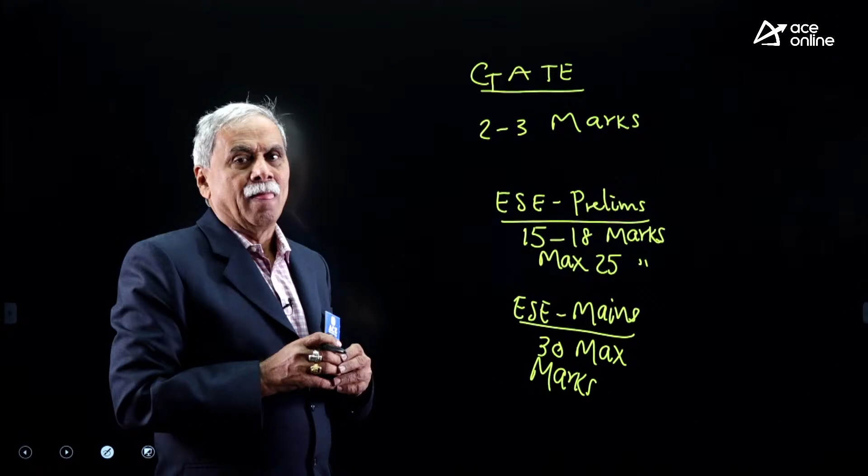If you take ESE prelims, 15 to 18 marks, sometimes maximum of 25 marks. If you take ESE mains, maximum 30 marks. You can understand, for GATE, irrigation engineering is not a scoring subject. For ESE prelims and ESE mains, it is one of the most prominent, as much important as fluid mechanics, as much important as geotechnical and environmental engineering subjects.

Approximately I have given. Slight variation may be there in the actual paper. It all depends on the year-wise team of the paper setters. This is mainly intended for GATE paper. Let us see. If you refer to the GATE examination: basics of water resources engineering, soil, water and plant, water requirement of crops, quality of irrigation water,

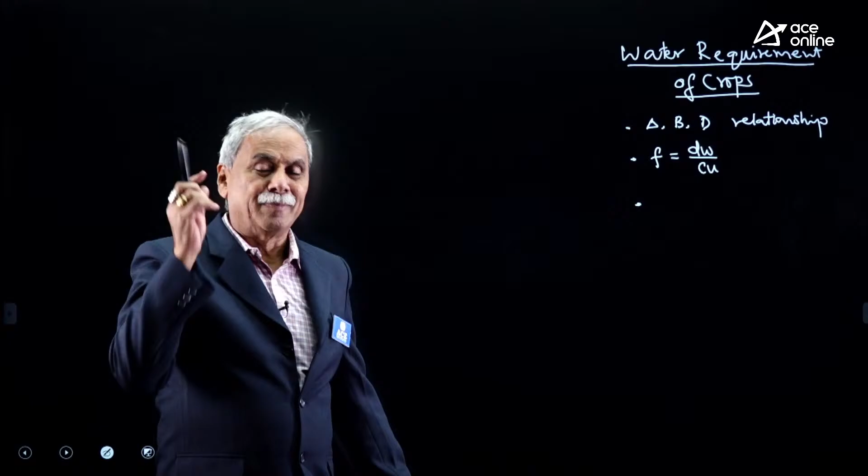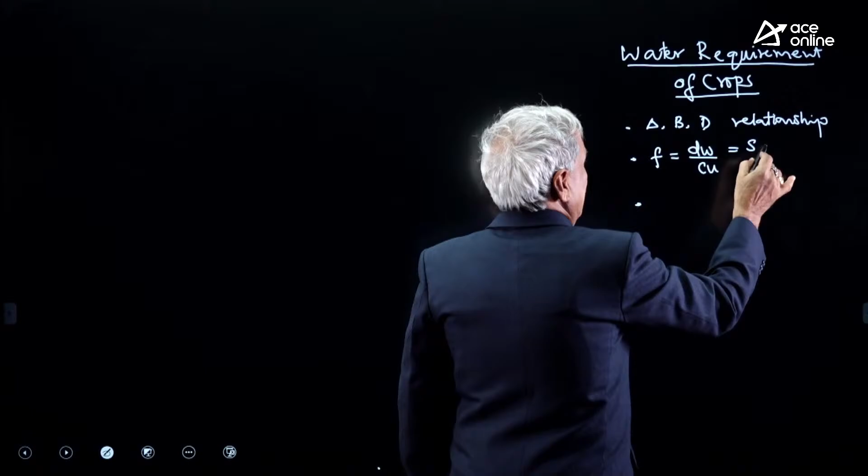Delta is equal to 8.64 B by D, 864 B by D, 1.98 B by D. Frequency of irrigation is equal to dW by Cu. What is the time interval between one watering and the next watering? Time gap between 2 consecutive waterings is called frequency of irrigation. It depends on specific gravity of the soil, root zone depth, field capacity and optimum moisture content divided by consumptive use.

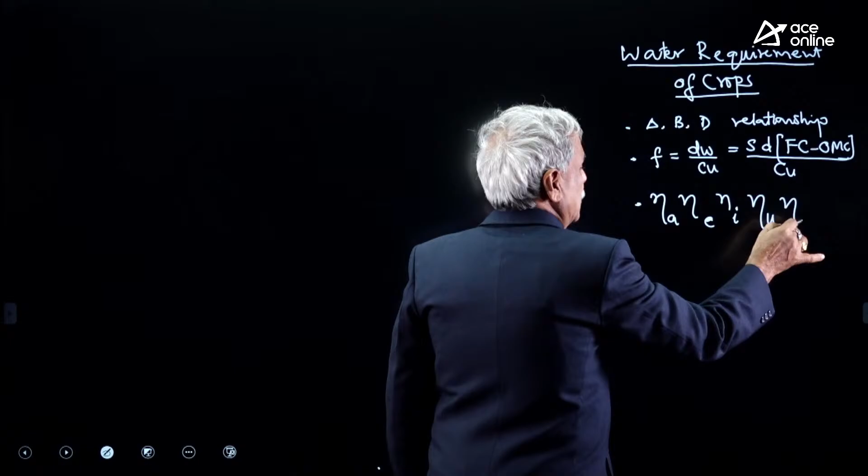The 5 types of efficiencies are very important. Water application efficiency, water conveyance efficiency, water irrigation efficiency, water use efficiency, water distribution efficiency. Water consumptive use efficiency, like that, they are not that much important. Please practice these 5 formulas regarding water efficiency.

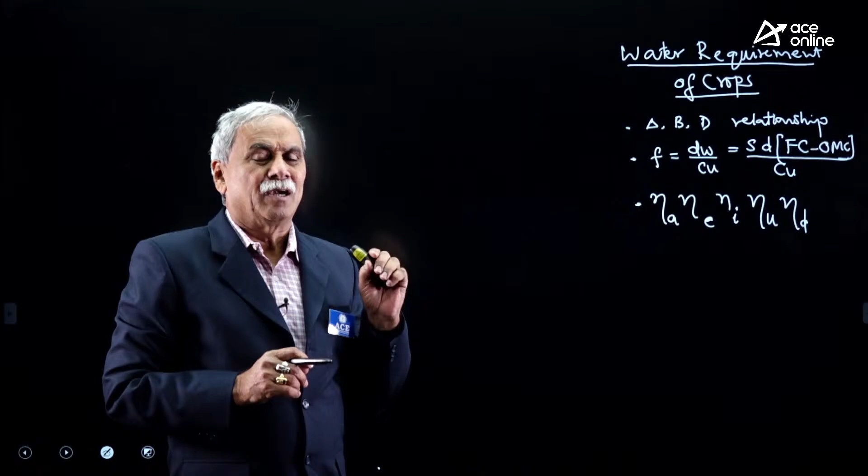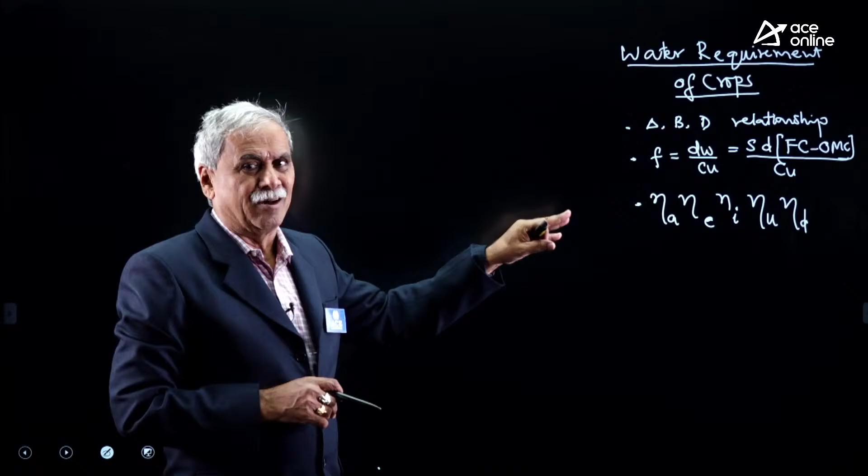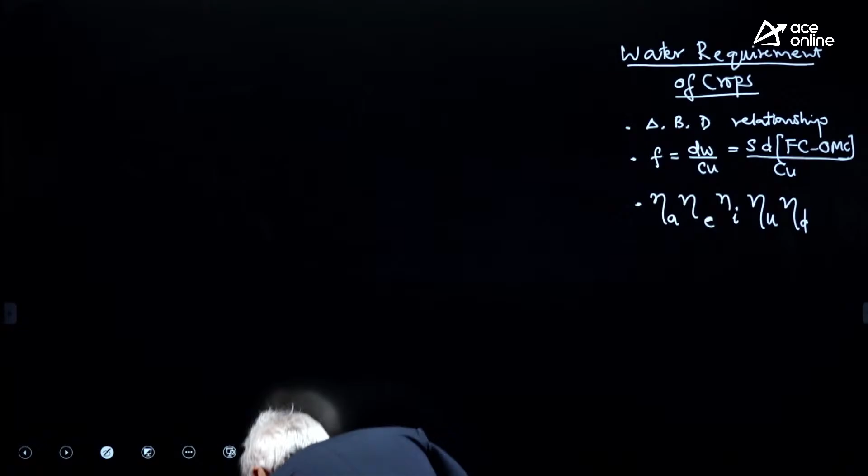Water application efficiency, that is in the field. Water conveyance efficiency in the canal. Water irrigation efficiency overall. Water use efficiency in the field including leaching. Water distribution efficiency, that is statistical efficiency. Then we should know FIR, what is consumptive irrigation requirement, net irrigation requirement, field irrigation requirement, gross irrigation requirement.

Then you must know what is intensity of irrigation. Then you should know fixation of line discharge of the canal. Fixation of reservoir capacity. These are the subtopics you have to concentrate on while you are preparing for GATE from the chapter of water requirement of crops.

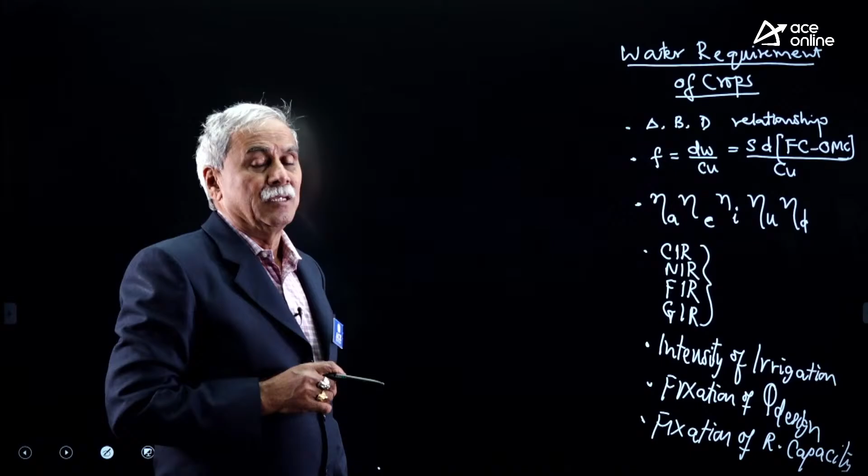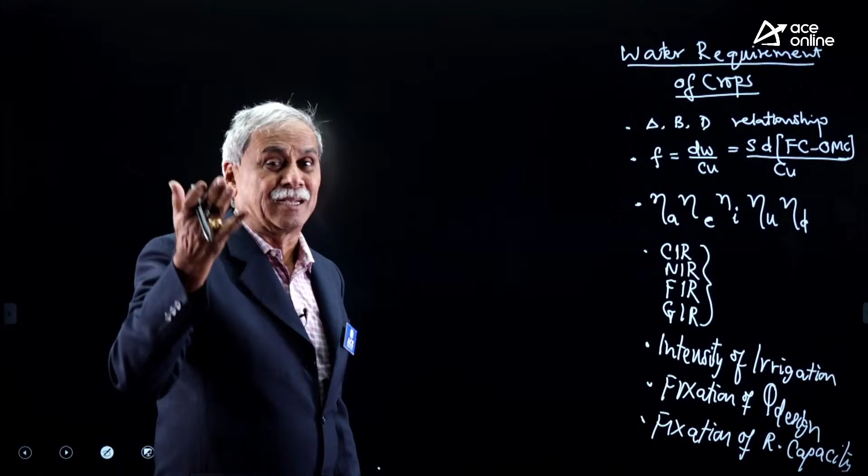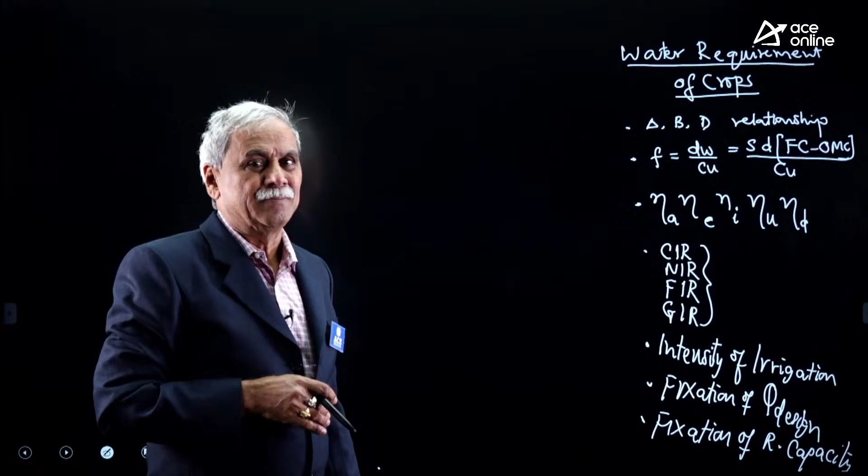Relation between the 3 water requirements, duty, delta and base period, their definitions, relation like dW by F is equal Cu by 1 is equal delta by B, such strategic formulas, very, very important. What are the factors affecting duty? At what points with what name is duty being called? How do you improve the duty? By crop rotation, etc. These are the water requirement of crops, most important ones.

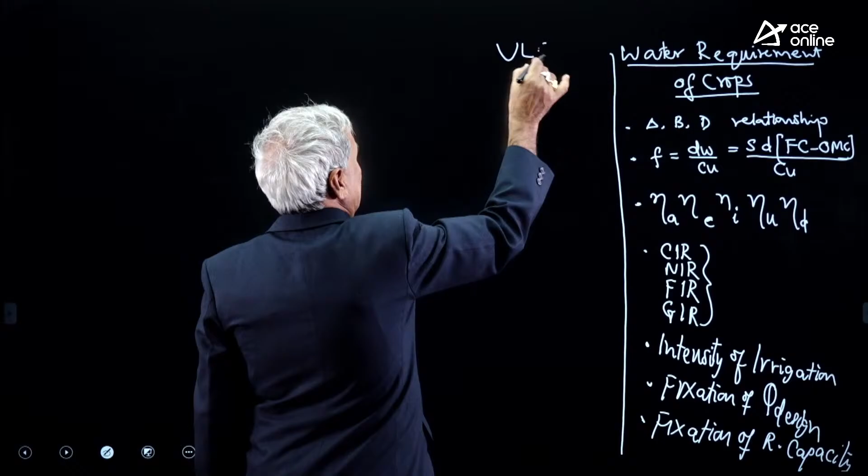In the design of unlined canals, what are the causes of silting and scouring? Kennedy's theory. Its drawbacks. Lacey's theory. Its advantages and drawbacks.

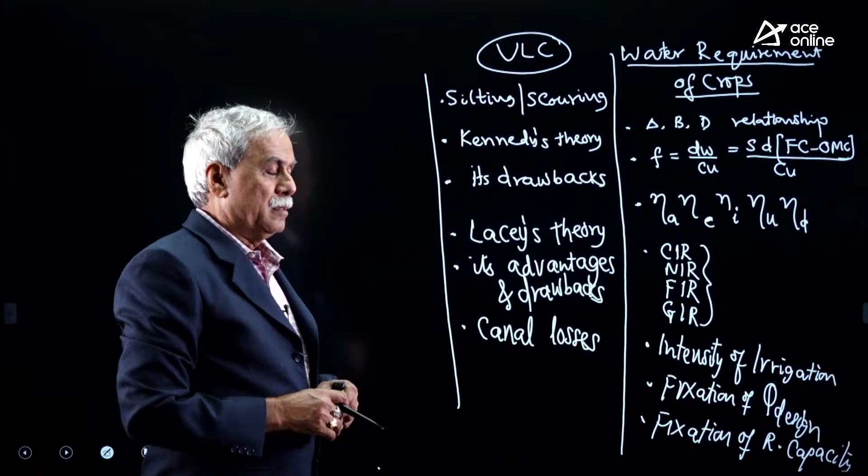Canal losses. We know evaporation losses are minor losses. Seepage losses and percolation losses are major losses. Around 2 to 3% is evaporation loss. Around 20 to 30% will be seepage and percolation losses. Something about the losses also must be known. Speciality of Lacey's theory. Importance of Kennedy's theory. What are the critical differences between Kennedy's theory and Lacey's theory? Generally, they will ask you.

Non-silting, non-scouring velocity is a function of what parameter in Kennedy's, what parameter in Lacey's. In Kennedy's, it is the depth of the flow. In Lacey, it is the hydraulic mean depth. In Kennedy, V0 is equal 0.55 m D power 0.64. So, critical velocity is a function of depth of the flow only. Whereas in the case of Lacey's theory, critical velocity is given by V is equal to root of 2 by 5 f R. So mean velocity or critical velocity is a function of hydraulic mean depth in the case of Lacey's theory.

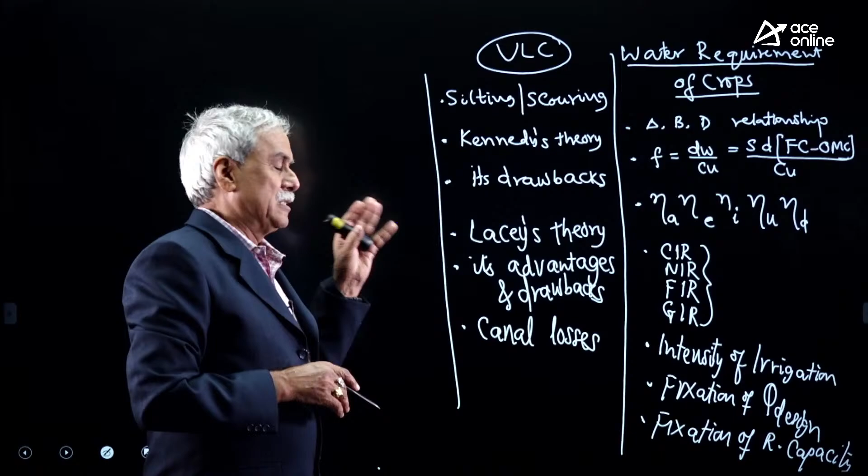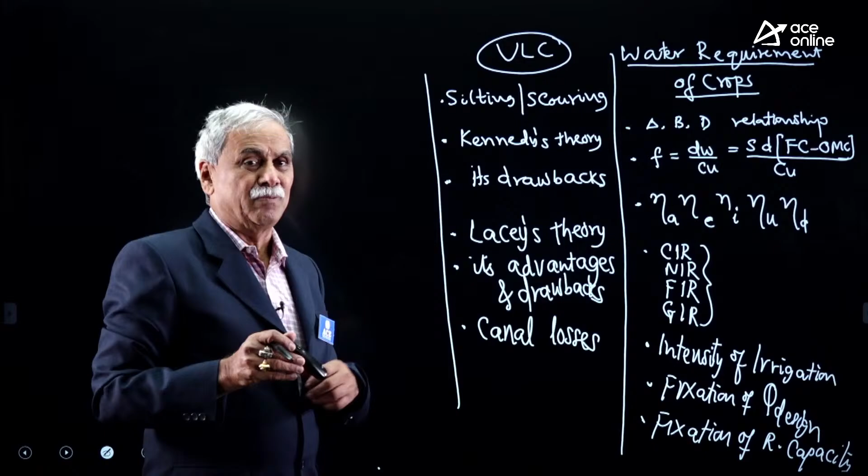What are the advantages, what are the drawbacks of Lacey's theory also you must understand. Their mathematical formulas. In Lacey's theory, how many are fundamental equations? How many are derived equations? What are the graphs drawn between various parameters? Basics of mathematics in solving the questions also important.

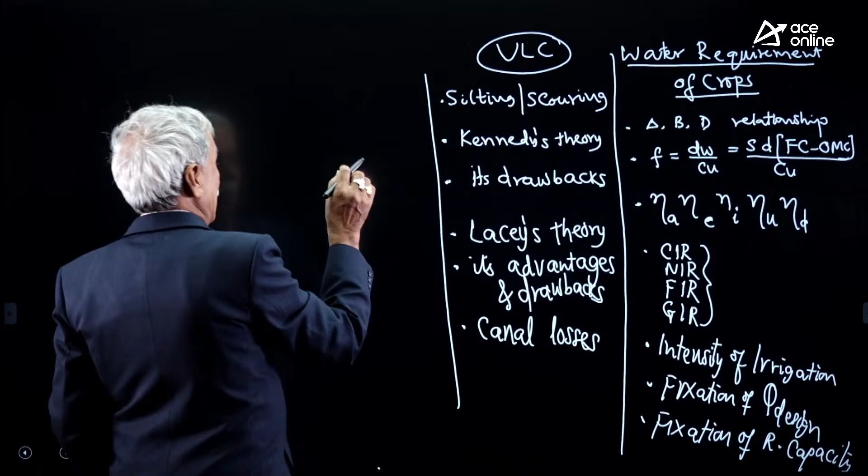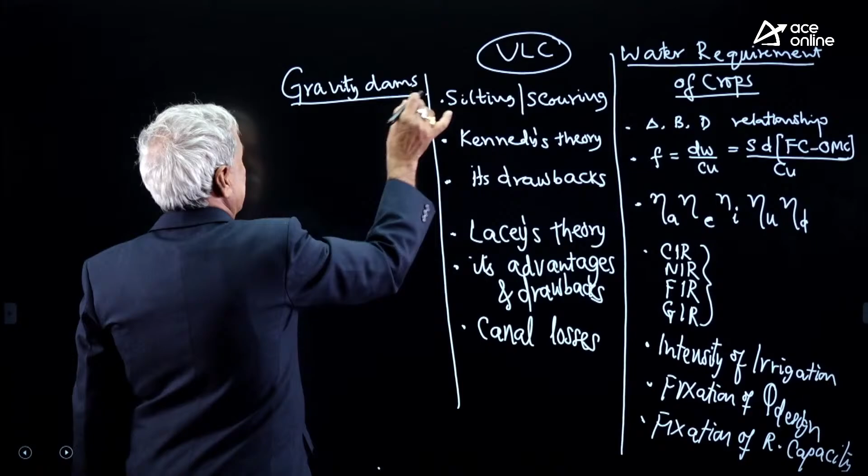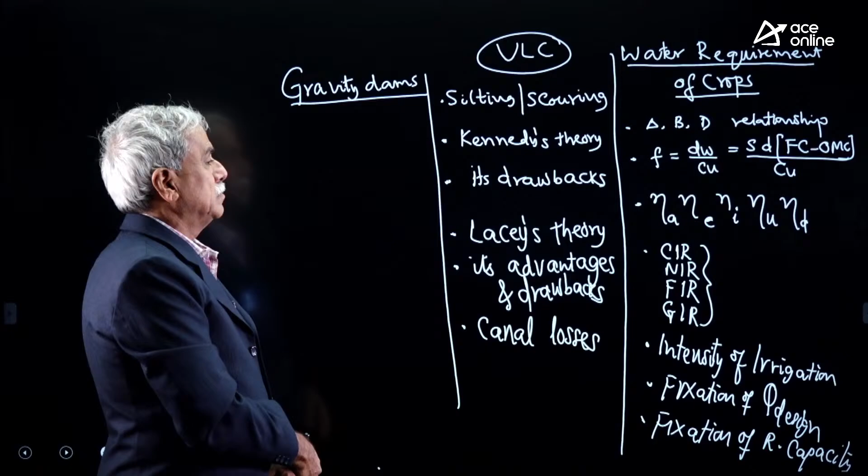Then in the third chapter, in gravity dams, what are the most important subtopics? Water levels in the reservoir, water storages. What do you mean by limiting height? Fixation of a freeboard. What is the use of the limiting height to decide whether the dam is a high dam or low dam?

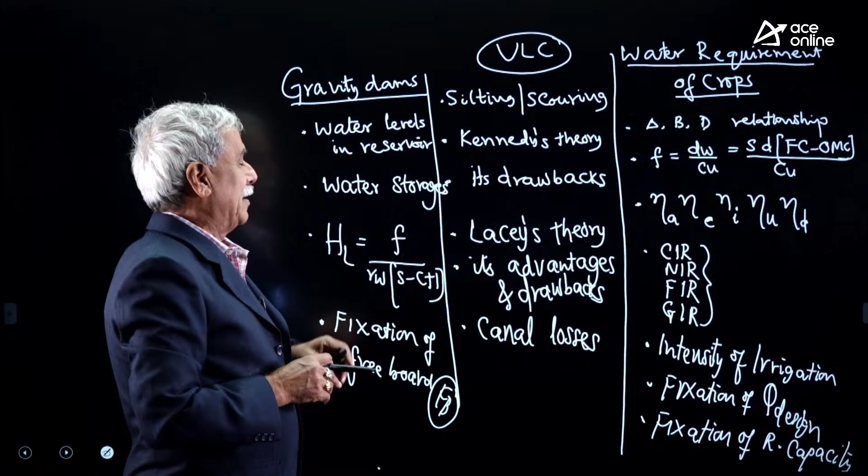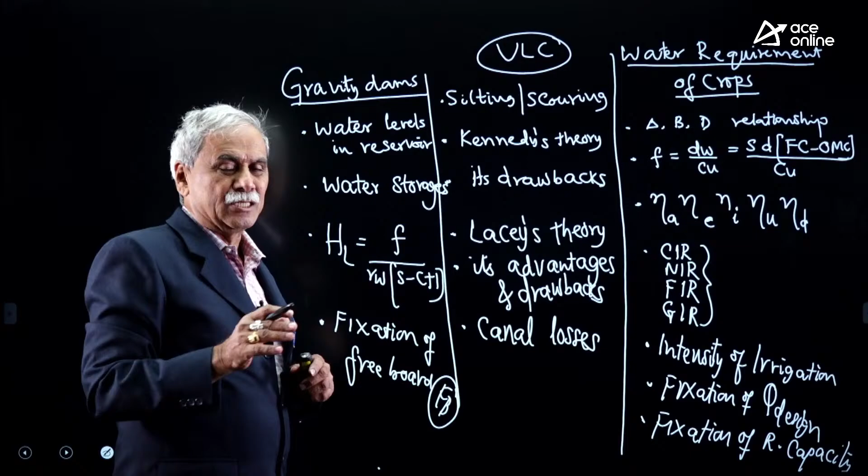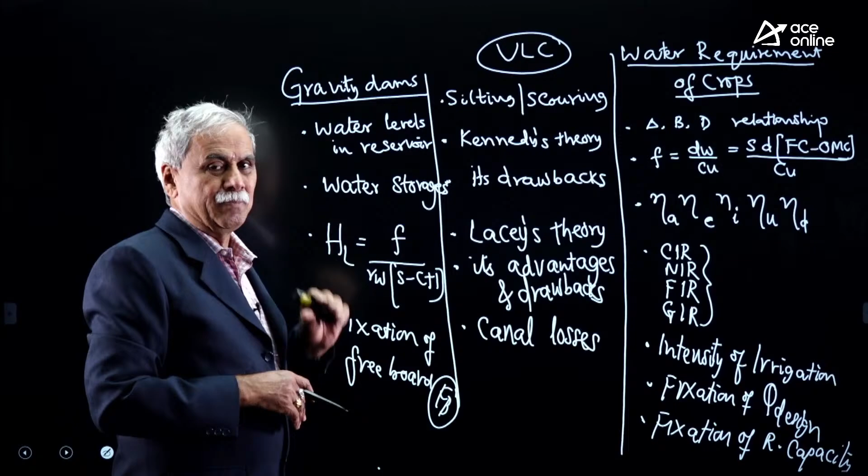What are the different water levels? What are the different water storages? Surcharge storage, live storage, dead storage, valley storage, and the bank storage. The 5 storages, 4 water levels are important. I hope you know pretty well. Limiting height will decide whether the dam is a high dam or low dam. If H is more than HL, high dam. If the actual height of the dam is less than or equal to HL, low dam. You must understand the points.

Forces acting on a gravity dam. Moments of the forces. P1, P2 water forces. Self-weight and uplift force are vertical forces. PS, PW, silt pressure force and wave pressure force. Special conditions. In the seismic zone, force due to earthquake. In the Himalayan region, force due to ice pressure. Total 8 forces. We consider 6 forces. Major forces are 4, P1, P2, W, U. Minor forces are only 2, PS and PW. You can get this very easily.

After this, what are the modes of failure? Sliding failure, overturning failure, compression failure, and tension failure. How to decide whether the dam is safe in all the four failures or not. In sliding failure, we got FSS, we got SFF also.

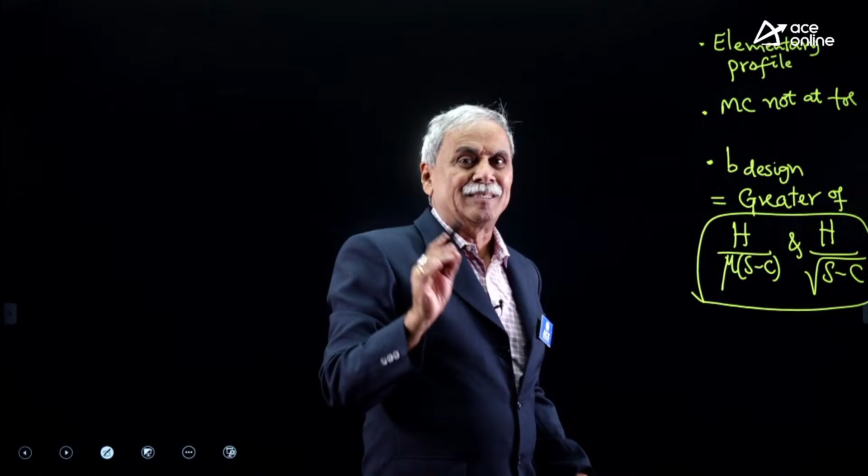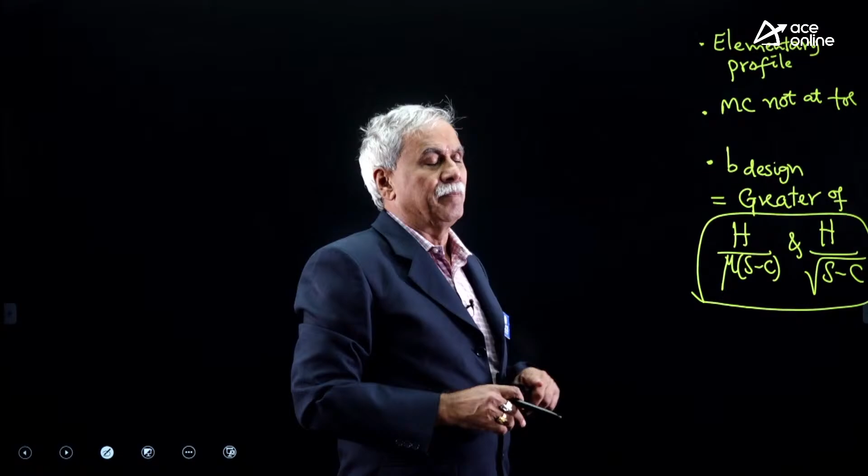The design base width will be the greater value of H by mu into S minus C, and H divided by root S minus C. To be safe in sliding this one, to be safe in overturning called stability, minimum base width. Whichever is the greater value, we must provide in reality in the construction; the base width of the elementary profile must be kept as the greater value of these two.

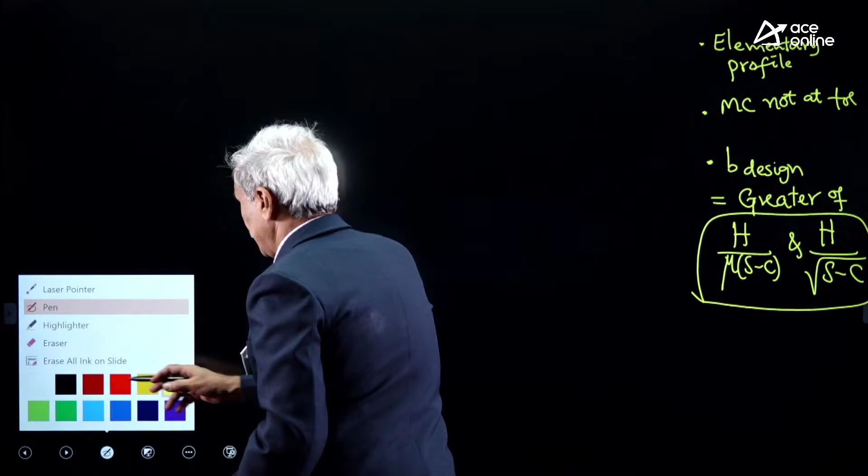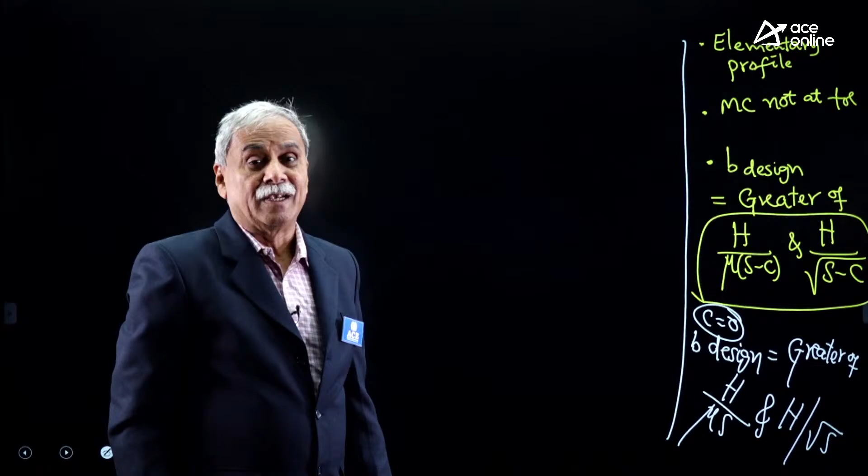In the absence of uplift, B design will be the greater value of H divided by mu S and H divided by root S. When it is given without uplift consideration, calculate the two values, whichever is greater. So from this particular area, definitely you can expect one question. Definitely you can expect one question.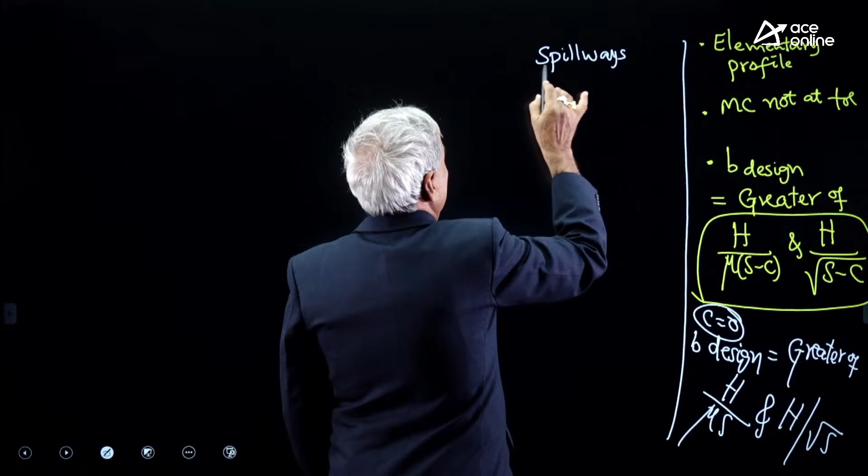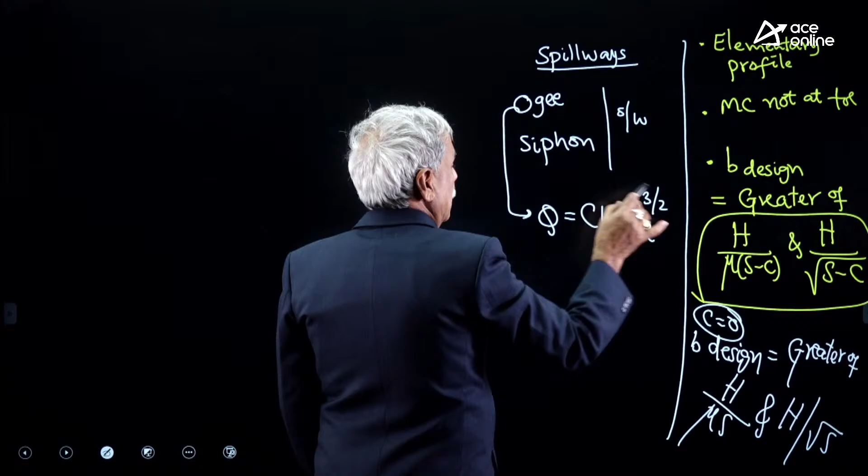Attached with the gravity dams, we got spillways. Ogee spillway and siphon spillway are important for us. Ogee spillway with Ogee profile, with effective length, the three formulas in Ogee profile. The first formula will give the discharge. The second formula will give the Ogee profile on the downstream side. Third formula, how do you calculate the effective length of the crest in case of Ogee spillway?

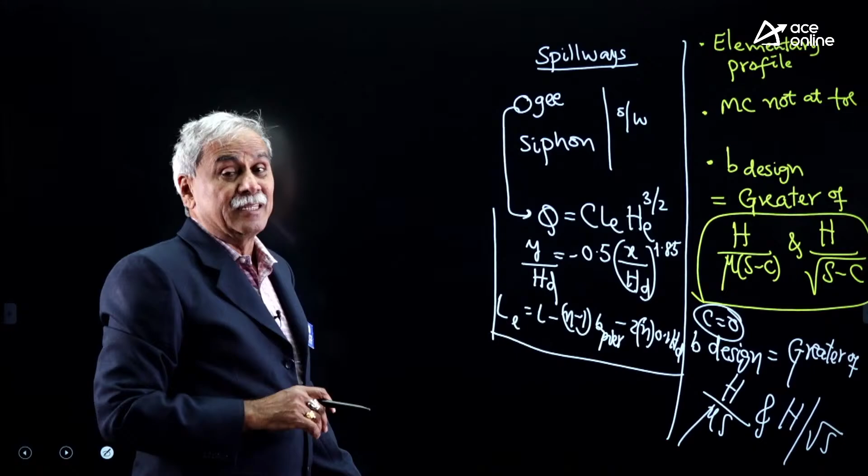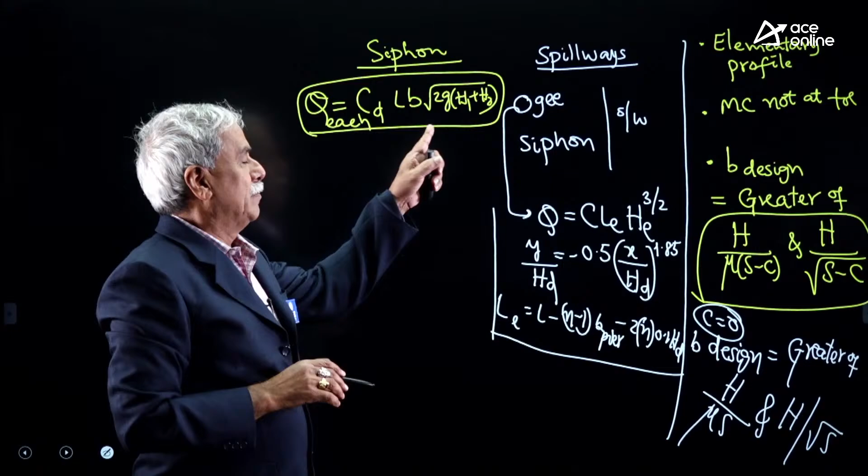In case of siphon spillway, Q is equal to area into velocity; area is L into B, velocity is root of 2G into H1 plus H2. The amount of water being disposed of through each siphon is given by this. If you want to dispose of more discharge, two or more siphons must be connected in parallel.

In gravity dams and spillways, these are the subtopics. In the ESE examination, and of course in one GATE exam also, they asked about energy dissipators. That is also an equally good area. Energy dissipators. By mathematical equation, you get JHC, in the real field

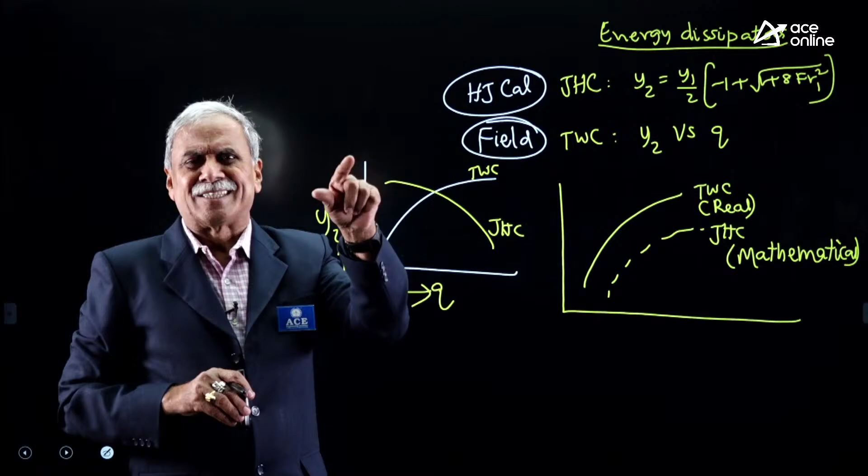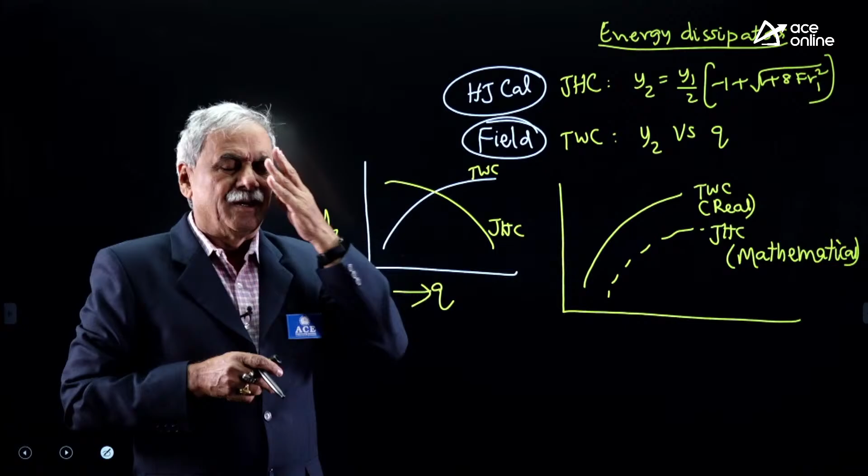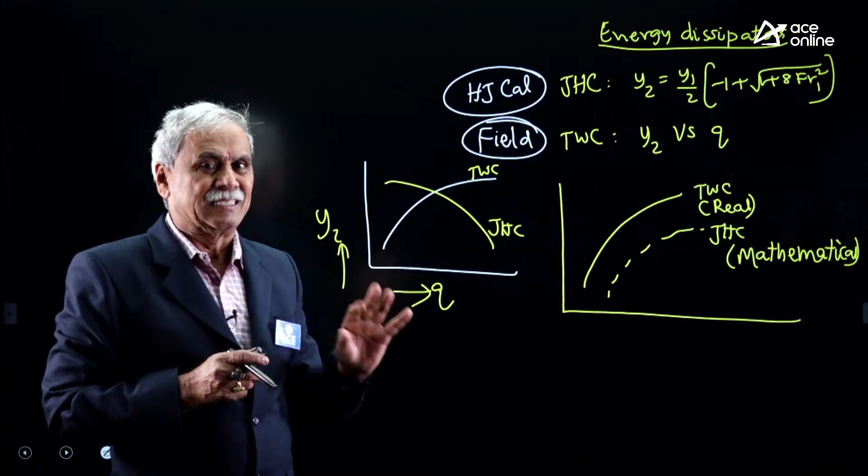Easy way to remember in what situation what type of energy dissipator is to be provided. Just have a gist in the mind, revise once or twice before the examination. They are only memory based. When the hydraulic jump will be drowned in the water, all these things you practically cannot think about that much in the exam. In what situation what type of energy dissipator is provided, that is important for us. And its reverse.

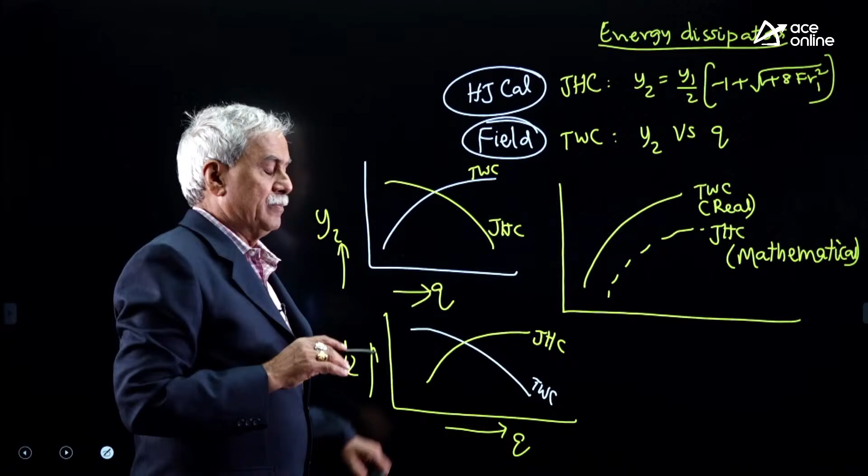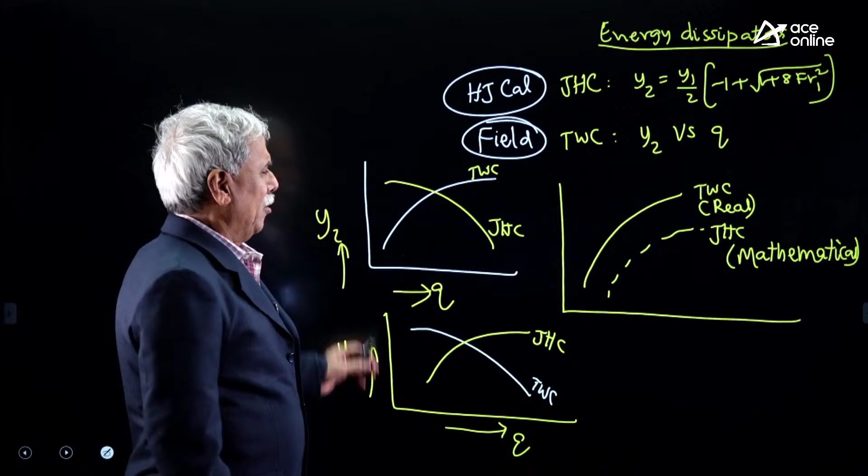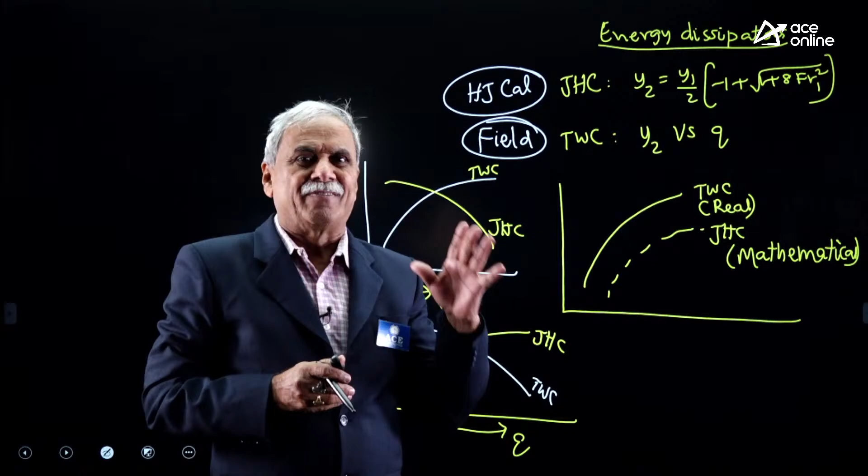For small discharges, TWC lies above, first half of the length of the sloping apron above the riverbed. At high discharges, TWC lies below. Naturally, the sloping apron will be below the riverbed for the second part. All 5 cases will be there. You should remember, they may give match the following. They may give the reduced levels and ask, for this type of data available in the field, what type of energy dissipator you are going to provide. Please remember this.

One more most important area is cross drainage works. You should know aqueduct and siphon aqueduct. These two come under type 1 cross drainage work. Super passage and canal siphon, they come under type 2 cross drainage work.

When do you get type 1 cross drainage work? Immediately your mind should recall the points. Q canal less than Q drain, Q canal around 20, Q drain around 200. The 20 cumec canal water runs at higher elevation at the junction. Drain water is permitted to go on the ground, type 1. If canal discharge is 200 and drain discharge 20, drain water is permitted to go to the higher elevation and come back, that is type 2. If a canal runs over the drain, type 1. If a drain runs over the canal, type 2. If both run at the same elevation on the ground, type 3. We never come across type 3.

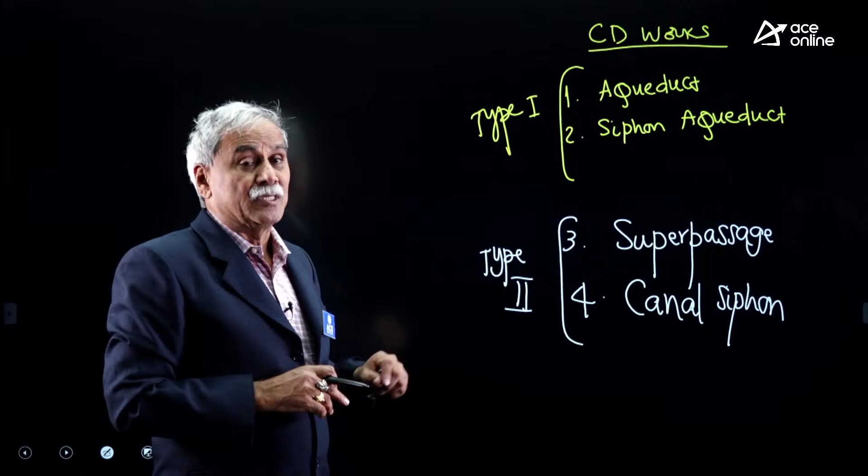Type 1 without siphonic action, aqueduct. With siphonic action, siphon aqueduct. Type 2 without siphonic action, super passage. With siphonic action, canal siphon. These 4, problems and theory. In Monday's class, we'll solve 1 or 2 problems. Also, we'll be discussing the very important 4 figures. You must practice. They may ask a figure. They may ask a descriptive question.

Cross drainage works is one important area. They may give a numerical also on this. In canal regulation work, one more important is canal modules. When do you say rigid module? When do you say semi-rigid module? When do you say non-rigid module? The definitions and their mathematical formulas are important.

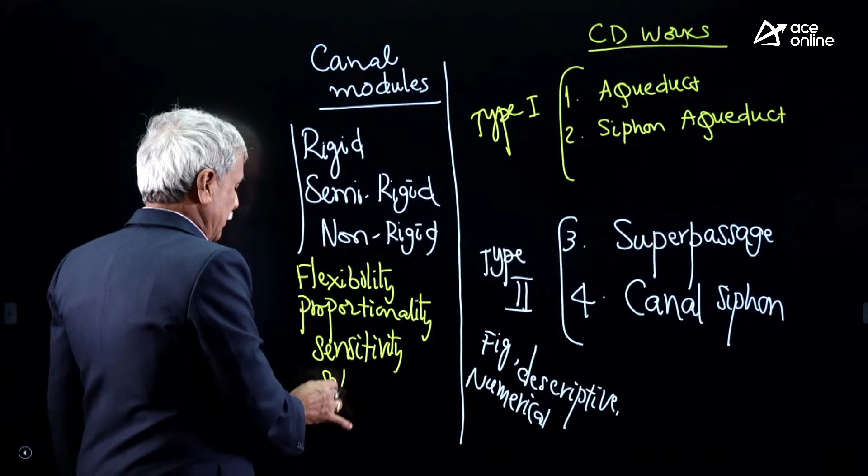Simultaneously, when you are preparing the canal regulation works in canal modules, what is flexibility? What is proportionality? What is sensitivity? And what is setting? These four definitions, their mathematical formulas, they are very, very important.

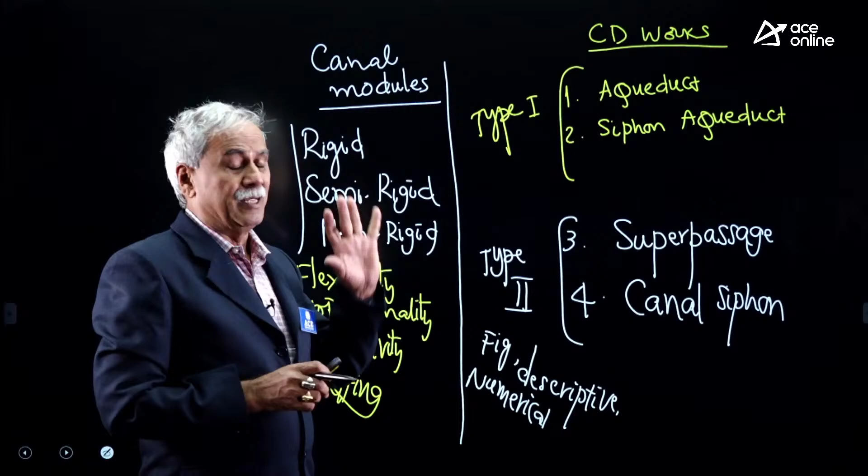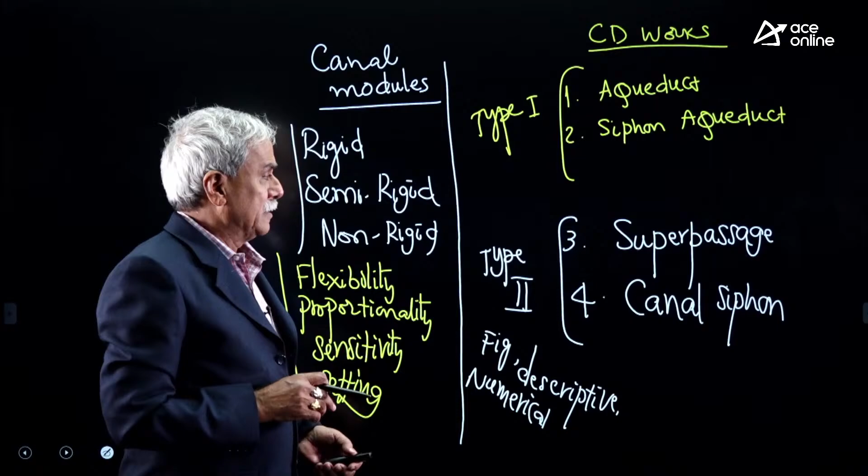The first chapter generally, I'm telling about methods of irrigation and the basics of water resources engineering. They will ask on methods of irrigation. When do you go for furrow irrigation? When do you go for sprinkler irrigation? When do you go for flooding? What is the advantage of border strip irrigation?

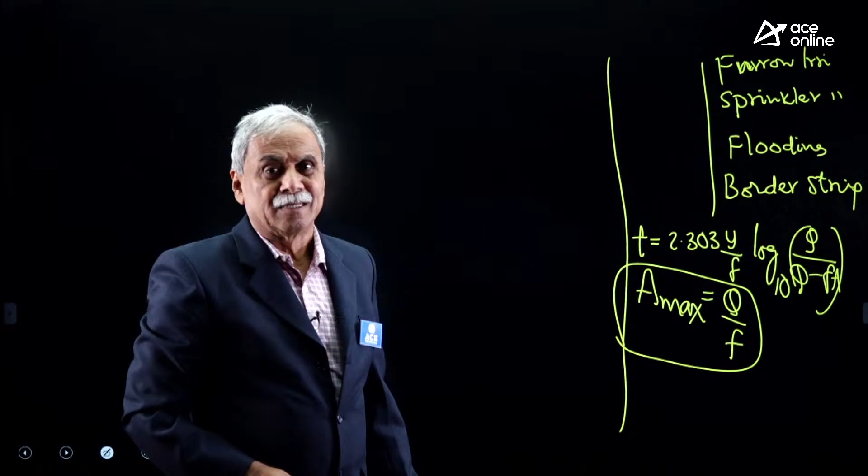In the border strip irrigation, 2 formulas are important. What is the time required to irrigate a field? T is equal to 2.303 y/f log10 of Q/(Q − fA). Maximum area that can be irrigated without any external storage. Most important formula of the chapter is maximum area that can be irrigated is equal to rate of supply of water divided by rate of infiltration. This area also very good area.

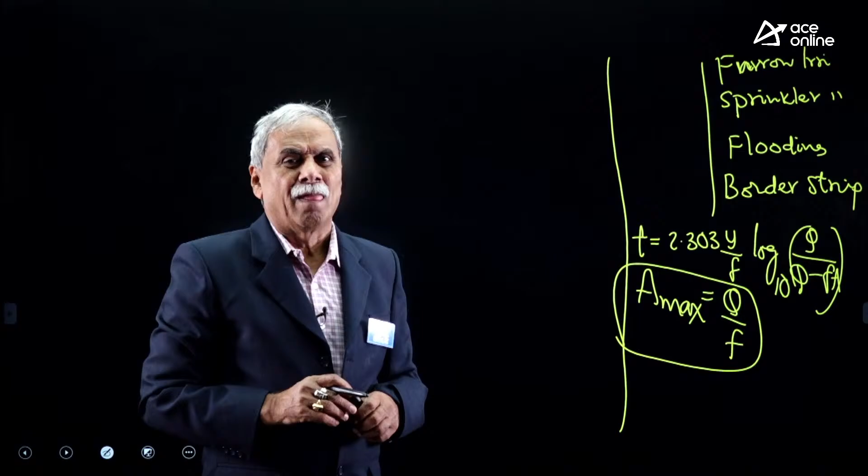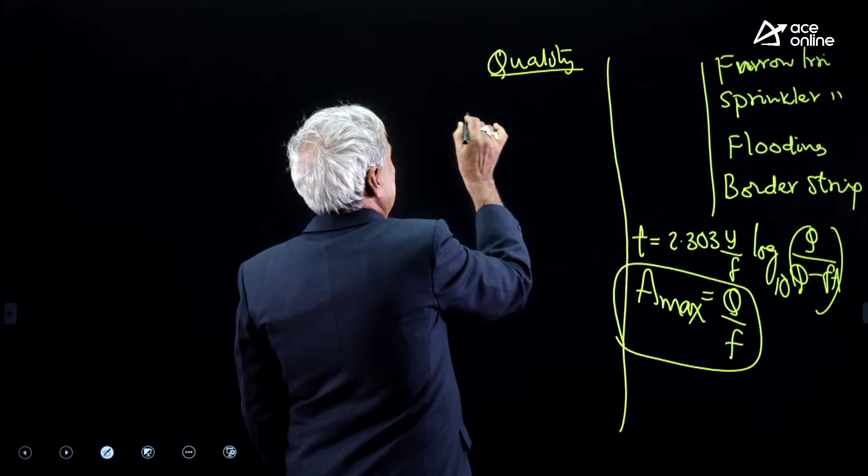In the fourth chapter, quality of irrigation, only one point is important. What is the sodium adsorption ratio? Sodium ion concentration by square root of calcium ion concentration plus magnesium ion concentration by 2. If at all they give the question on the quality of irrigation water, I am telling about both GATE and ESE, gunshot, they will give on SAR.

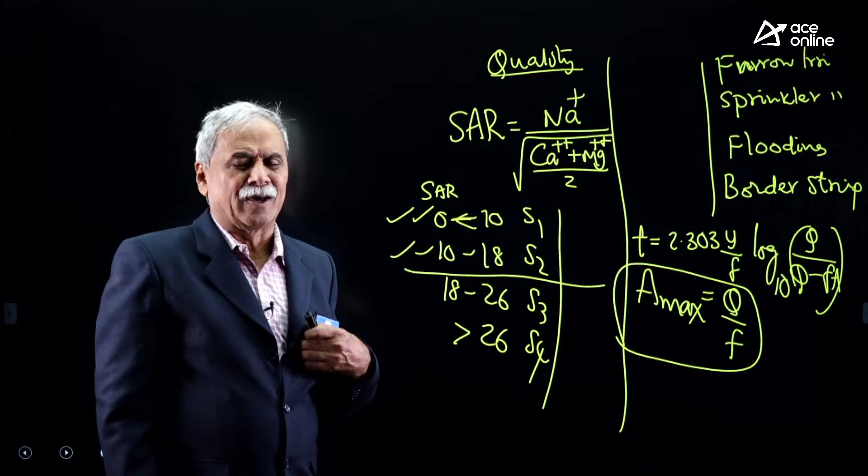SAR value 0 to 10 S1 water, 10 to 18 S2 water, 18 to 26 S3 water, more than 26 S4 waters. Low sodium, medium sodium waters preferable. S3, S4 waters are having high sodium. They are not permissible to get delivered to the field for the purpose of irrigation. Lined canals, generally they will ask about hydraulic mean depth formulas only. That is not much important.

And gravity dams, spillways, diversion headworks. There is one area where in ESE examination, very important topic is the diversion headworks. What is the difference between weir and barrage? What are the seepage failures? When you construct a weir or barrage across a river, there are 5 failures.

Failure due to scouring action, failure due to standing wave formation, failure due to rupture of the floor, failure due to uplift pressure, failure due to piping or undermining. Then, to prevent or control failure due to piping, what is the importance of Bligh's theory? With what modifications Lane's theory is developed? With what revolutionary statements Khosla's exit gradient theory is coming in practice?